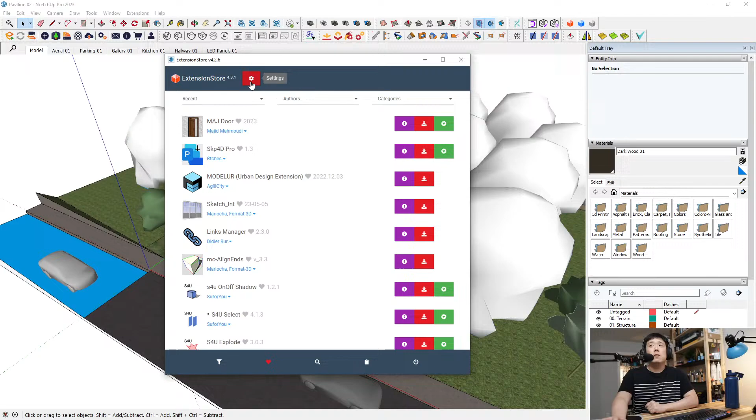Once you click on that, using the login you signed up with, you'll be greeted with this kind of screen. One of the biggest benefits I find using this is going to the settings, where I should be able to see all the machines I've downloaded extensions from — it remembers all the profiles I've used on this account.

And if I go back to a long time ago where I was using, let's say, a MacBook Air, for example... maybe nothing.

Okay, this one here from year 2017, I had about 50 odd extensions installed. So I can go ahead and download all of those if I wish to. It's a good way to keep track of all the extensions you have used in the past. You can certainly update all the extensions that you have and also search for a certain type of extension you would be looking for. I'll show that during this streaming session.

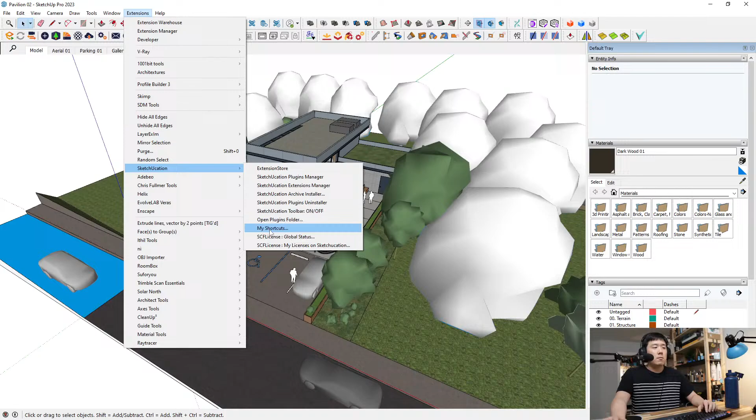I just wanted to let you know there are two different places to look for extensions. One benefit, on top of being able to download the profile, is under the SketchUcation dropdown, you are able to go to My Shortcuts. If you go there, this window will appear and it visually highlights all the shortcuts that you currently have. It's a very good visual tool to see everything in front of you.

I will be sharing a lot of shortcuts because I am big on shortcuts, and I want you to get in the habit of using them. A lot of them are going to be custom. I stick to as many standard shortcuts as possible, but I like to make my own, and I pretty much have them as muscle memory as far as using them. So I will go over whichever customs I have assigned.

For you to assign one, you just go down to Window Preferences, and then under the shortcut side, you should be able to find something. For example, if you want to assign an offset, I have assigned O. As a default, O would be orbit, however I have changed it to offset because I prefer to use O for offset. I just use the middle mouse button in order to orbit around, so that's what I have assigned. To do so, you just go here, press O, and then press the plus button. That's how you can assign custom shortcuts.

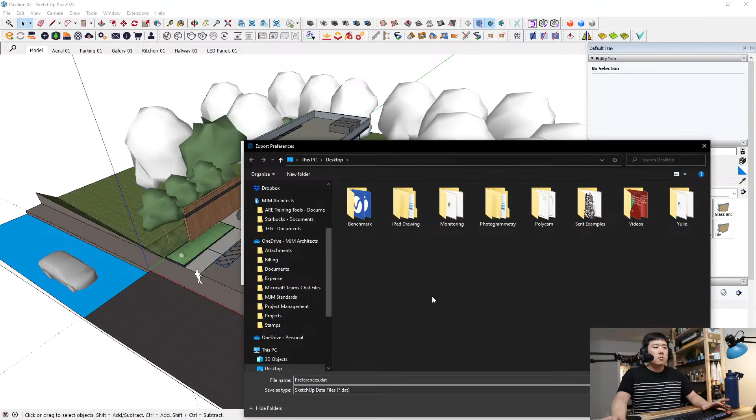And then when you have those shortcuts, you can basically export them and import them as well. So I usually export all of my shortcuts out so that I can import it on a different machine or a different version of SketchUp.

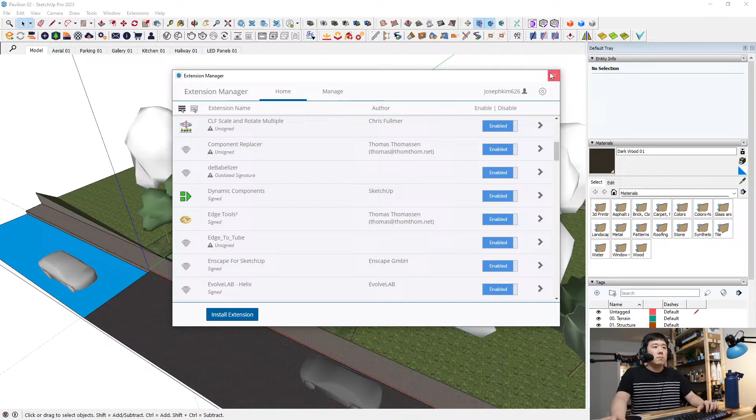So with that out of the way, I want to drop a couple of SketchUp general tips. First thing is, as everybody does, I still would like to use 3D Warehouse of SketchUp, and I'm sure a lot of you already have used it before. So, 3dwarehouse.sketchup.com, or just search 3D Warehouse on Google and you should be able to find it. In here, I often just search, or I usually have my own components available.

For you to find this, you can just say white outline, and then you're going to have to click on models because products have a priority of being shown up on your list. Click on models, and then the first thing that's going to pop up is white outlined 2D people. If for whatever reason that doesn't show up for you, then you can just say white outlined people, and that should really pop up.

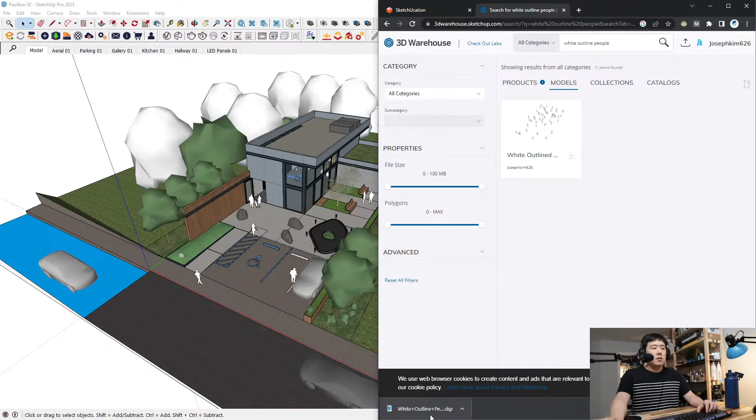You can just download that onto your machine, and then drag that onto your model. You can literally drag and drop, and once you do, those people will pop up. I like using these people because they are simple and not photorealistic, which can be quite distracting. They're light to run.

As you rotate, you can see they are face-me components, so it kind of makes sense in the scene, and they're not as distracting as other types of people you may find. I don't like having a whole bunch of color in the model, so I try to keep them light by using these type of people.

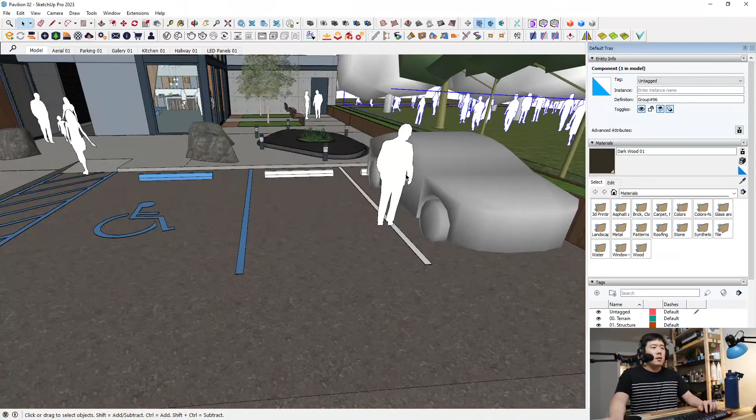In regards to placing people, do keep in mind that you want some grouping or story or reason for them to be there. Obviously, if time's at stake, you're just going to spread them across a field like this, and it doesn't really make sense. But in this case, I try to have somebody next to the car, perhaps trying to get in it - maybe it would have made more sense if he was opening the door of the car.

And somebody just going up the ramp, somebody passing by, and a family of some sort here - I've put two people together just to make sense, like they're coming out of that entrance having a bit of a talk. So having a bit of a setting to the scene doesn't hurt at all, and that's what I like to do as far as placement of people.

Something you might have noticed is that in my dialog, I can go down to styles, and once I hit edit, let me collapse this so you guys can see better. Here, what I like to do is turn off the profiles. Often profiles themselves could increase the amount of calculation that your computer has to do, so I usually turn them off altogether.

If any, you want to put it at 1 so you can see the outline of the trees or blobs that you have. Sometimes people do prefer having that, but your machine could come to a halt if it's turned on, especially if you're working with a model with a lot of edges. So in this case, I want to turn them off.

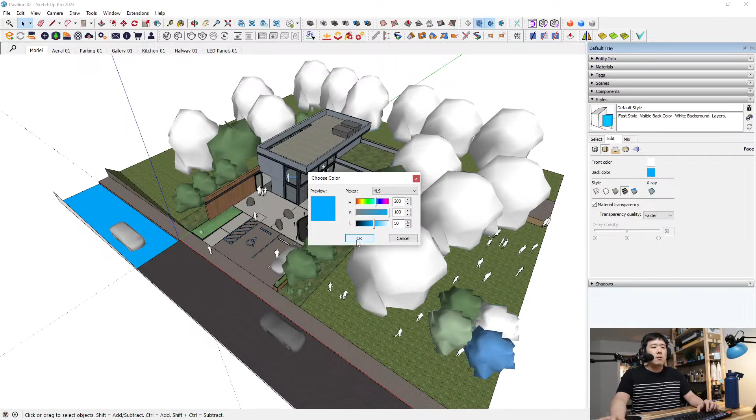So it's good practice to make sure your models are not reverse faced. My favorite color just happens to be teal or bluish, so I made it bright enough to spot them from miles away. For example, this one is where the solid and the modeling wasn't all complete, but you can spot it immediately because of this bright color.

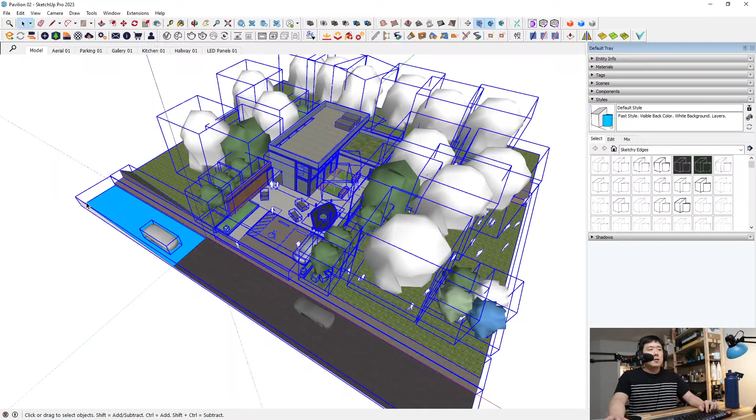So that's what you would like to do. Once you have your favorite style ready, I advise you go to File and save it as a template. Once you have that as a template, it will show up when you start a new model. However, since I've got a lot of assets, if I save this as a template, all of these will show up every time you start a new model, so I'll save myself from doing that. But you do want to get in the habit of using a consistent style.

Another thing to save as a template, or inside the template, is the layering system as well. So perhaps you need to save it as tags, not layers - sorry, tags system is something you can put together that makes sense to you and your type of projects or tasks that you're doing.

In this case, I like to use a numbering slash naming scheme. All the basic information such as terrain, topography, Google Earth, or Google Photo type of thing, I like to name them and have it as 00 so it shows up on top of the list, then goes down to further secondary element structure.

Walls and such, doors and roof and windows would be number 2 category. Obviously the numbers could differ, and your list could be longer or shorter. In my case, I found this somewhat useful, so I stuck with similar organization, varying a bit between projects. This is an example of the tags system I've got going, and I'll come back to that in a bit.

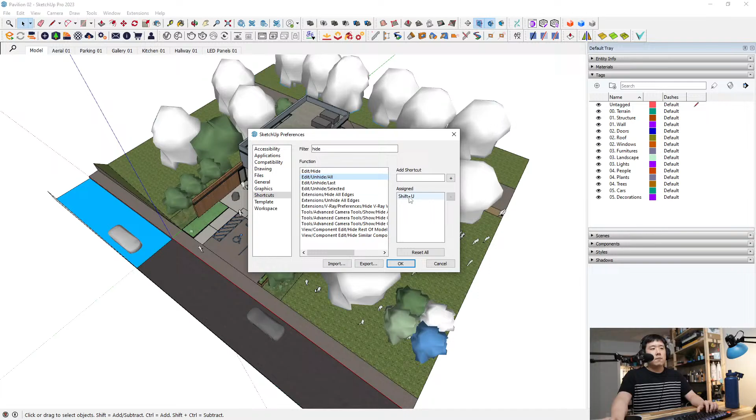Something I also want to mention is usage of shortcuts. One custom shortcut I'll be using in the background - if I search hide, I have Shift H as hide, and unhide all as Shift U. So the keys I'll be pressing - if I want to look inside this model, I can't really see inside.

If I go to preferences and then hide, there is model hide, but also view components hide rest of the model, and I have H as hiding rest of the model. That's essentially going to view, then component edit, and hide rest of the model.

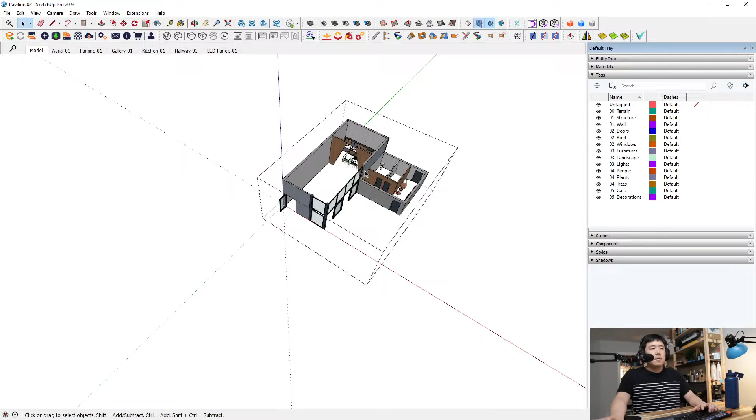What that really does, once I click that or hit the shortcut key, is hide the rest of the model and just highlight or isolate the view of whatever component or group I'm currently working on. That becomes really handy because you can go back and forth easily, either to reference something or just look inside so I can easily edit something. So that's a really easy tool to use, and it's going to come in very handy.

That's something I'll be using. Again, for hide and unhide - I highlight something like a roof here. I have it as a separate thing instead of moving it, because if I move it, my machine thinks it's basically going to physically move them, and I don't want to do that. So I go ahead and Shift H, which is hide, and if I want to bring back the roof after working inside, I press Shift U, which is unhide all, bringing back the roof. So I can hide the roof to work inside, and Shift U to bring back everything. That became a fluid workflow for me, so you can certainly use that.

As far as the layer slash tagging goes, there is an extension from Sketchucation Store. If you just go ahead and search layer name, you can see a couple of extensions showing up.

The reason for this is tags used to be called layers, and I guess the extension names didn't really follow the updates to SketchUp. Here is the one from Tig - layer name export and import is the one we're looking for, made by a person who goes by the name Tig. He's someone who makes a lot of extensions that I use.

So you can go ahead and install and download. Once you do that, you may get a little prompt like this, and then you can choose the first one, then choose the auto install folder, and just say yes, okay. Once you have that, then you're going to have it installed.

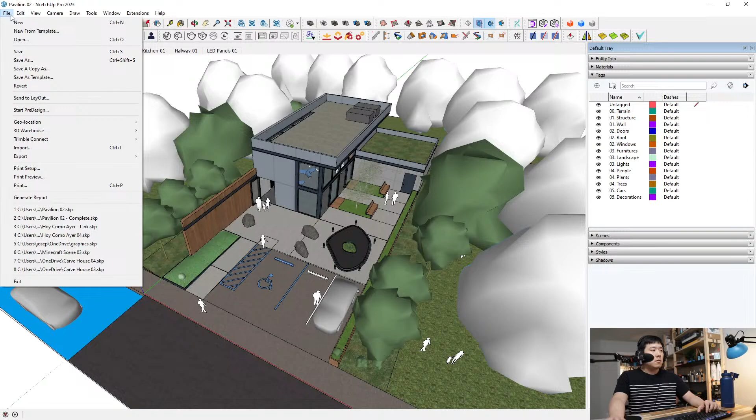Then I can export all the layers that I have so I can bring it back later, or I can go to import so I can bring in all the layers I've got. So I've saved it here, I can just click on it and open - it's going to import all of these layers, even if I had them deleted.

Okay, if I had it deleted, I can use import, and you see how it all came back? So that's something you might want to keep in mind, so that on your template, even if you deviated from the layer list, you can import something again, or maybe you accidentally deleted something and want to get it back, you can certainly do it that way.

All right. Any questions so far?

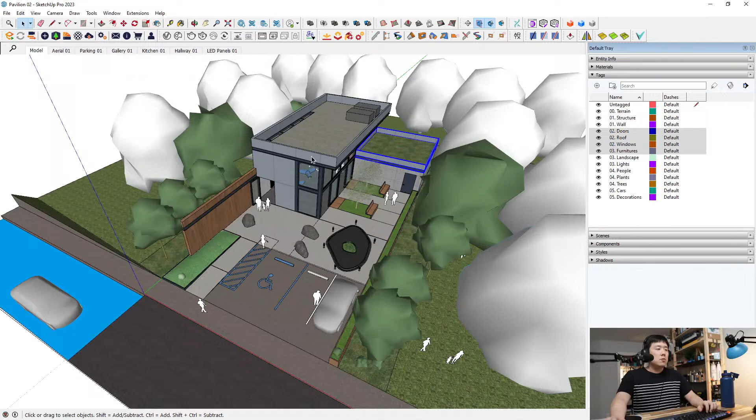Something I do want to cover is copy and paste in place. It becomes quite important because paste in place is actually a default in a lot of Adobe softwares. I don't know why, but SketchUp does not have a default shortcut for paste in place. I'll explain why this is so useful. You can assign a shortcut of Control-Shift-V instead of Control-V for paste. You want to utilize Control-V as well. So my shortcut: cut is Control-X, Control-C for copy, paste is always Control-V universally, and then paste in place is Control-Shift-V.

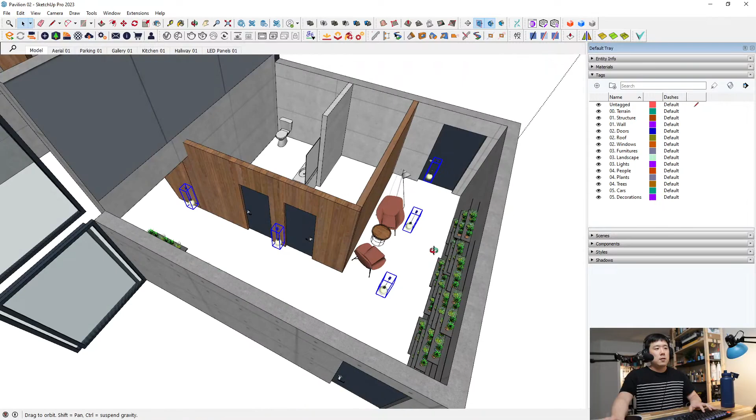Once I hide this and go in here, perhaps you can see that these lights don't really belong in the floor group, or this group that contains all the furniture. So I want to bring all of these pendant lights into that group, and I think it's good practice to do so. Previously you might copy, go into the group, paste, and somehow try to reference something to place them—it's going to be really hard. Whereas if I go ahead and paste in place, or Control-Shift-V for short, it's going to show up exactly on that spot. So you can easily do that. However, now I have a duplicate because I have those pendants outside as well.

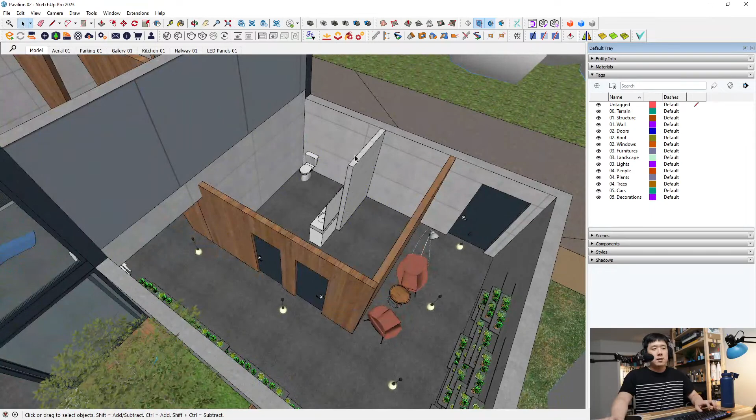So let's go ahead and combine a couple of shortcuts that we picked up. I can select all of these and then cut, Control-X. Then if I double click into the group I want to paste it into, and then Control-Shift-V, that will basically place them in there, and it won't exist outside of that group. So that is a good method to move certain elements in and out of a component. I've done that to bring those things in, and I can do the same with these lights or furniture into a group. Or if you really want, you can cut something out and paste it outside to take it out of the group it belongs in. Those are good practices to get into.

Again, you saw the usage of hide and unhide as well. And as you might have seen, I go back and forth between these saved scenes. Give them a good, meaningful name rather than scene 1, 2, 3, because when you're doing a streaming session or presentation, it's going to be very hard to remember what scene 3 or scene 4 was supposed to be. So it's good to click on them and snap back onto those specific spots you intend to have conversations about.

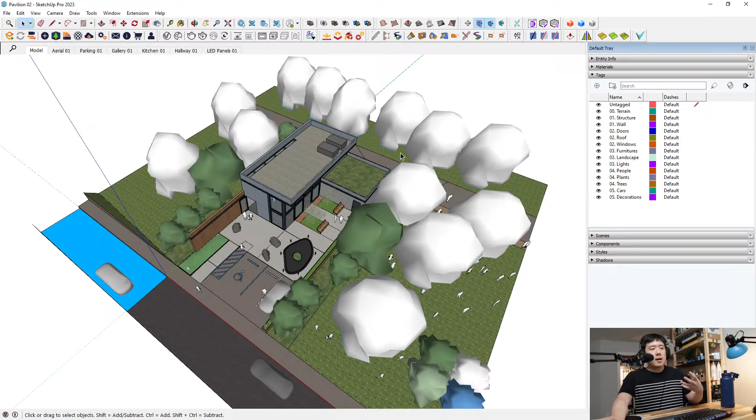As a general practice, I always have a first scene named 'model'. That is to go back to my modeling scene—it just backs out and unhides everything so I can easily snap back to a spot where I can start modeling. Or an aerial view is okay too.

But I also turned off the scene transition. Sometimes scene transition is nice to have, but it takes some time and may actually stutter your machine. Often having animation going through floors and walls is not as nice, especially when working with a very complex model. So in my template, I actually have them turned off. To do that, you go to Model Info under the Window menu, then go to Animation, where you can enable scene transitions or turn them off altogether.

There was one time where there was a bug inside of SketchUp where the time of day would not change on certain rendering engines. So the only way to address that was to have it checked, but set as 0 seconds.

So it just goes to the next scene, but the time of day is respected by other external rendering engines. I have it set this way, and it makes no difference whether it's turned off or turned on. However, if it has any seconds inputted there as a default, I think it's 3 seconds.

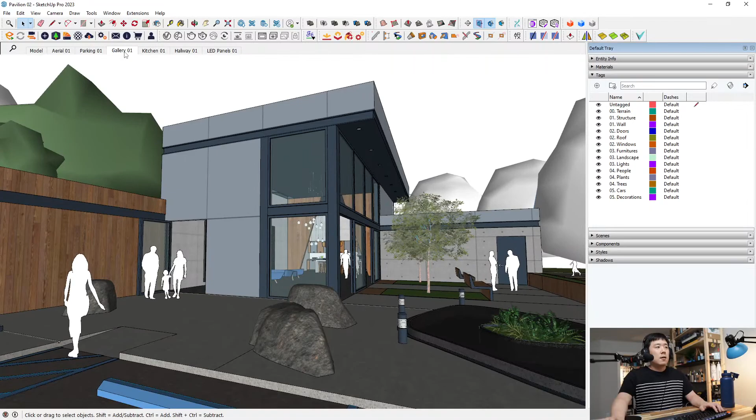Once you do that, you see those animations between scenes. I think in this case it kind of works well because you're just swooping down into the scene, even the gallery. But again, the approach shouldn't be through the glass. Obviously, it doesn't have the intelligence to find the right path when you're going around your building. I'd rather go through this door rather than just bashing your head into the glass. So I don't think this sort of transition works so well.

And obviously, if you're progressing like this, again, I'm going outside of the model as I just pan into this shot. So it may be able to tell a bit better story about the approach and how you experience the space. But I just don't think it's a very effective way because, again, I just went through a wall again.

So personally, I like to just turn it off, or at least have it as 0 seconds so that no other software just kind of bugs out. So there, it's just snappier, and you can always talk about where they are.

And obviously, if I'm just going into the room, I want to do it like this so that people know which way I'm going through to find that space. But sometimes it's beneficial to have a specific shot so that I can go back to those scenes quite easily. So if I want that perfect angle, I can just click on this one so that I can snap there.

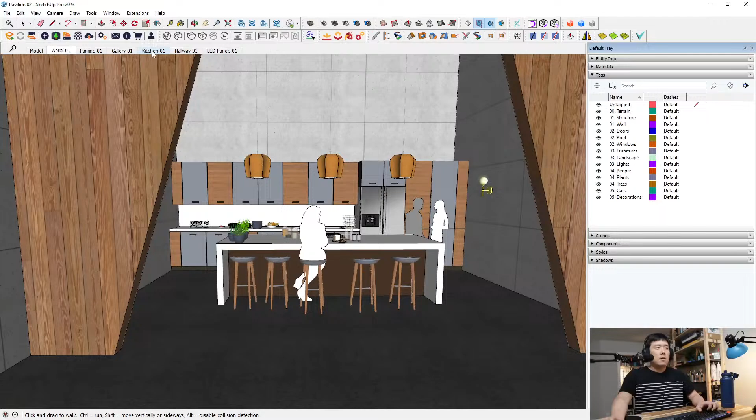And you might have seen me using a couple of other navigation methods. First of all, the orbit. I'm going to use the scroll wheel to zoom in and out. Obviously, you're going to find yourself doing that immediately, even as a beginner. But you can also click on the middle mouse button or the wheel to orbit around. That's a recommended way of navigating through your model.

And then whilst orbiting, if you hold down the shift key, then you're going to start panning around. All of that three-part navigation system—zoom, orbit, and panning—should be all of your muscle memory so that you can easily navigate through the model.

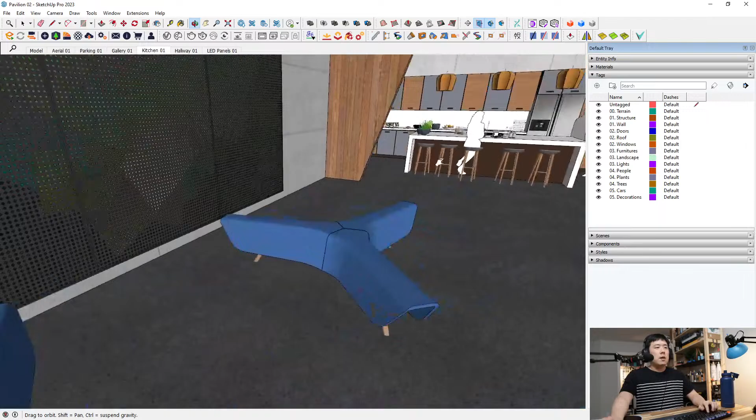Extra points for anyone wanting to navigate even better: if you want to look up and to the kitchen right now, a lot of people will try to pan and then orbit, pan and orbit, just to look up in the area. But again, that's not necessarily a natural movement.

You want to just look up as you navigate through your model, especially during the presentation too. Doing these sort of movements to look elsewhere is a little bit jarring, especially for people who aren't used to the modeling environment.

So what I like to do, when you're progressing into the model, if I want to swoop up and then look up into the entrance, is hit Shift C, which is the camera, and then the walk mode. It's not necessarily a walk mode per se—this is actually a walk tool.

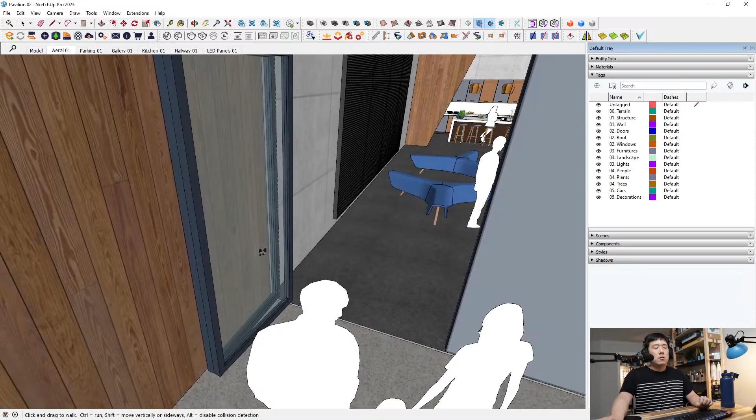And once you're in the walk tool instead of like a selection tool, the footsteps kind of appear in the middle of your scene. And then at this point, if you hold down the scroll wheel just like how you would orbit, you actually look around. So instead of moving, you're going to look in certain directions.

So combined with just a regular selection tool, you can orbit and pan, but if you want to look in a certain direction, just hit Shift C to change the camera. Then I can use the scroll wheel middle mouse button to look up in a certain direction, and I can just scroll in again basically to zoom.

And if you want a really smooth transition, I can look up somewhere and then hold down the left mouse button, and push it up a little bit so that you have this sort of slow animation within your scene.

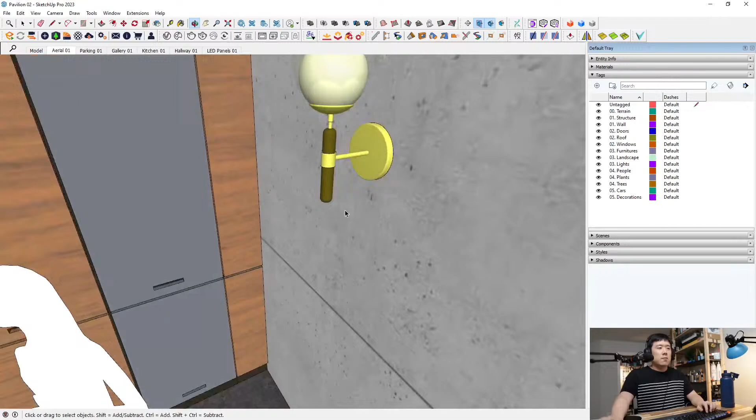So those are the aspects you can utilize, especially when doing a presentation. Perhaps I don't really need to do this when modeling - I want to be a bit quicker. So I may just use zooming if I'm trying to get somewhere, perhaps looking at the underside of this lamp. It makes overall navigation quite easy this way so you can look to a certain side, then hit spacebar to go back to the selection tool, and do that over and over to navigate better.

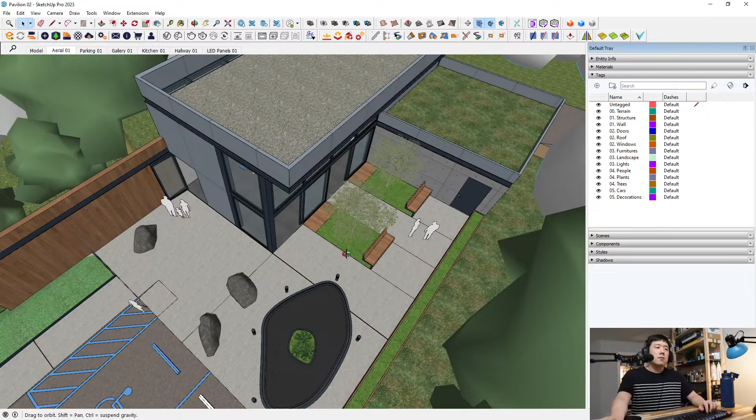So far I have not really covered any extensions that I'd like to use, and I expect this series to be a bit more expanded. Today is sort of the first episode, but on following weeks I want to cover more things so you guys learn more. So just bear with me.

The next one I want to mention is Purge All, something I've been using for I guess more than 15 years since I started using SketchUp. It's located under Extension > Purge, and this is an extension you have to download. If you go to SketchUcation and search Purge, the Purge All from TIG will show up and you can download it. Once you download it, you can also assign a shortcut for that extension, which I have done.

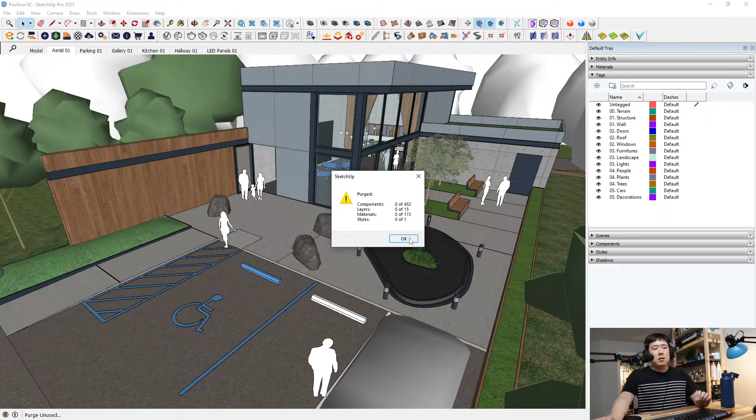So either you click on this or Shift 0 - that's me trying to zero out everything - and here I get to purge everything. By default, everything is set to yes, and once you do that, it purges all the things inside your model. If you've never run this tool before, you'll notice your model size improves significantly, because all the components you've used but not actually placed inside are still saved and eating up storage on your device. So it's good practice to run this to clean out and get rid of things you're not using. This is something constantly useful, and I have a habit of hitting Shift 0 every now and then to run this tool, then I hit OK to accept all of those things.

For whatever reason, if you want to keep a certain type of tagging system you already have - this is a dummy empty layer - if I want to keep that empty layer for whatever reason in the future, I can hit Shift 0. If I hit OK on this, it would go away because it's empty. However, if I wish not to do that, I can hit Shift 0, and in the purge layers dialog, I can say no. Then it just omits that part so it doesn't get purged, and next time I run it, it stays the same so I don't need to worry about accidentally purging the aspect of the model I want to keep.

However, in this case, I don't want to keep that layer, so I'll go ahead and hit yes, OK, and it gets rid of it quite easily. A lot of the time I just hit Shift 0, enter, and then enter, without having to click on anything else. So it's quite easy that way.

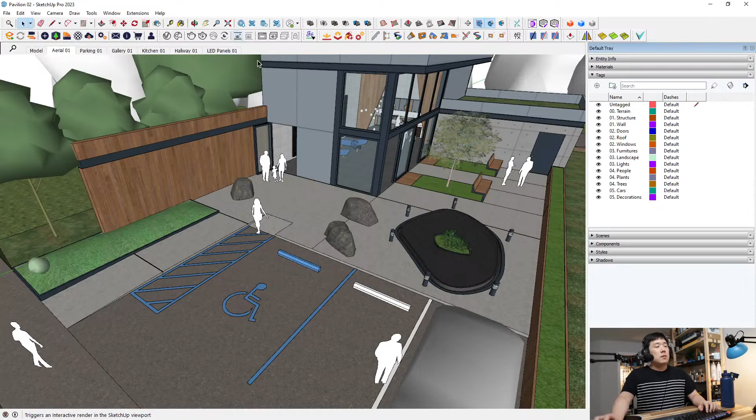The next one I want to mention is ThomThom's Selection Toys, available through the Extension Warehouse - here you go, Selection Toys. This is something made by ThomThom, you'll see his face on a lot of tools as well. You get to install this, and once you install it, you'll be bombarded by a lot of icons that may be available. But I don't really put up specific icons - I actually just use the context menu, which means the right-click menu.

In this case, when I was trying to select all of these lights, I was actually individually clicking them like this when they were outside. So let's just cut them out - I'm going to place them outside so I can easily select them again, just to show you that practice.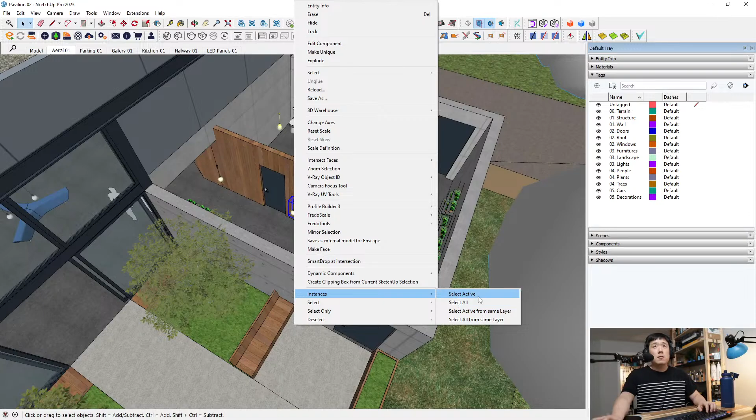I was actually holding down Shift key so I could add those things into my selection. But instead, I can right click this one, and there's a bottom context menu that appears due to the selection toy I just installed. Go to instances, select active, and it selects all of these things that are active in your scene. I can cut that, go into this group, paste in place, and come out of it. I've effectively moved those lights into that group.

And you see how quick that was. If I want to go back in and get rid of them for whatever reason, I can go ahead and do instances, select active, and it will select all of those.

For example, I have all of these tiny little plants repeated several times. I could individually select these, or use window select, but I can right click, instances, select active, and it is going to select everything.

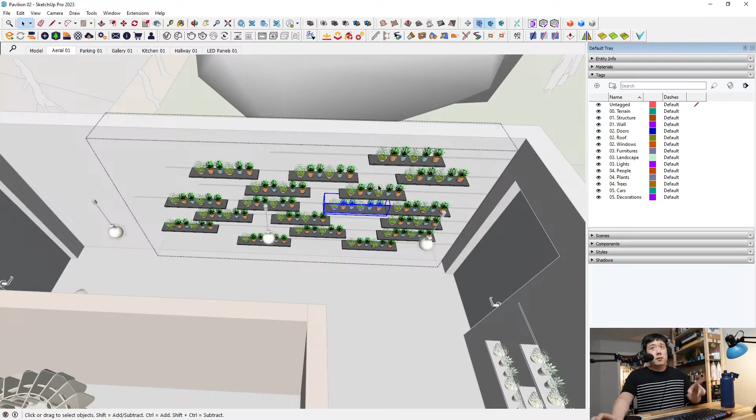However, it is instances active, meaning it will only select the ones of that kind within the group or component you're currently looking inside. So if I were to do instances and select all, you'll see it is actually selecting the other ones outside of this group as well. You can use this to your advantage.

Some of the things I could think of is possibly copying this, and then if I come out of it, even if I've deleted these aspects, I can do copy in place. Actually, that did not bring it into that there. Okay, never mind. But you are able to select outside of the active group that way.

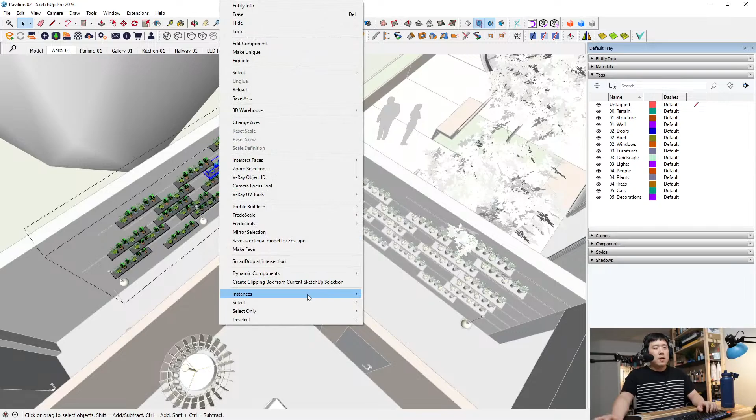But my most use case scenario is actually instances and select active. That's very useful for selecting all the same type of component you've used so far. For example, at these light posts, I want to select all of them, so I go here and have selected all of those, and can make it into a group so later I can come back and just go into the group to have them all collected into a little enclosure.

Next, in regards to selection toy, there are other aspects where it's going to play a role. Another one is when you're looking at more complex geometry like this, there's a lot of thin elements and it's kind of hard to get into the little bitty faces and edges that are here.

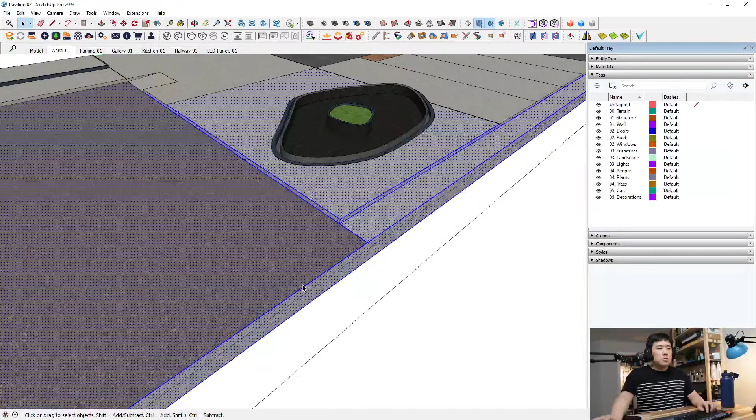So what you can do is have certain things selected, and you can say something like select only the edges. Then it will deselect all other aspects other than the edges. Or I can select all, which is Control A by default, then right click and say select only curves, arcs, circles, polygons, or faces. So if I want to deselect all the edges, I can do that as well.

So that becomes a really easy model manipulating tool, or something that's going to help you manipulate your model.

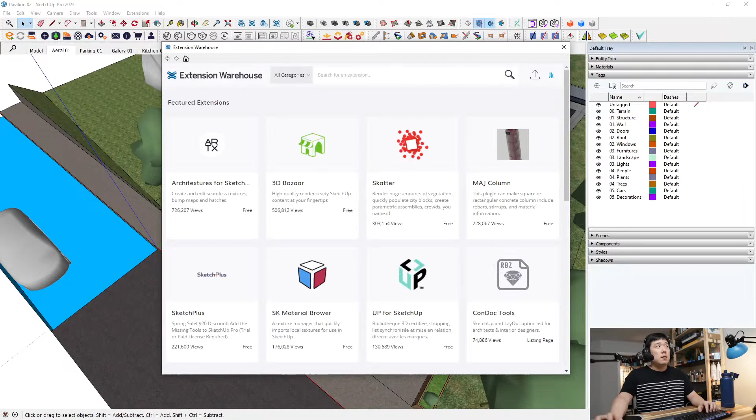The next one is extensions, extension warehouse, and you can search for something called Push Line. It's by Adebeo Pushline — I don't know how to say that — but you can download and install this one. I actually have that button available here, just wanted to show you visually, but I don't really need that because I already have a shortcut of Shift O, sorry, not Shift P, Shift O.

So if I do Shift O, for example here, I've got this slope and I would like to stick in a slope at just that incline so this car could rest on it. However, if I take a rectangle tool and try to do that, you'll see my rectangle doesn't really form that way. There is a way to do that, but it's a little troublesome. I think the easier way is to just push pull this line up to there so it forms a face, and I found that to be a bit more intuitive.

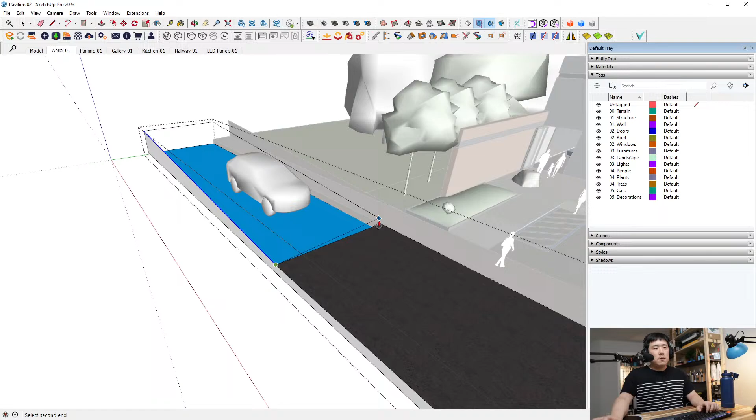So I hit Shift O. And once I do that, I can just click here and click right there, and it just forms the surface for me. And again, you'll still see this blue surface, which is the back face of the model.

I can correctly enclose that by taking a line tool and basically drawing a surface. In this case, I want this sort of asphalt on it, so I just applied it there. Now that car could rest on top of here.

Also I want to fill in this bit where the pavement goes up following the ramp as well. So I can just go here, double click. Again, I am using that hide rest of the model shortcut. Then use a line tool, take this one here, click on there, also click on here, click on there.

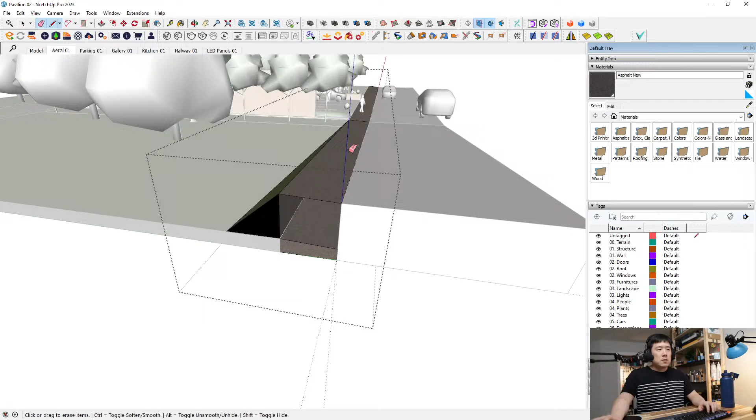Because this is kind of sloped in multiple ways, it is actually not going to be able to form a surface if you do a rectangle. So that surface needs to exist — actually, I guess I could delete that. And then also if I do triangulation here, there's nothing over here, as you can see. So I just have to draw that and then delete this one.

So now I have a slope that goes up along with the ramp that I have drawn. Actually, there is a little bit of slope, as you can see, so that's a bit that I can do. Perhaps I can even this out if I want to make it flat, but I think that's all right. So that's what you can do.

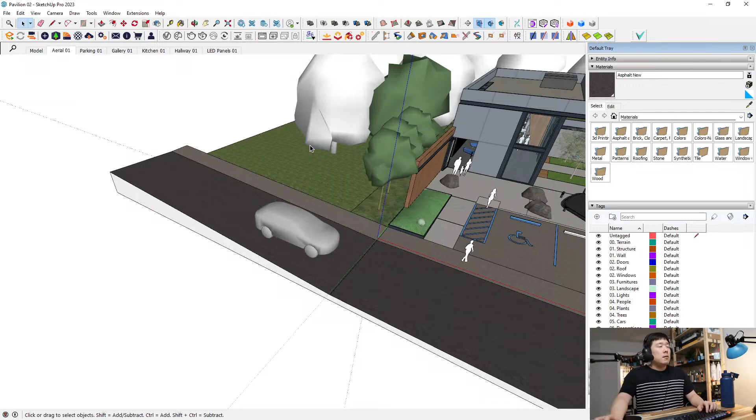Something that I want to do is basically dropping this car onto this surface. So I can go to extension and ray tracer, and that ray tracer is also available in the warehouse by ThomThom as well.

So this one here. Once you have that, something you can do — for example, like this planter over here — if I want to drop it onto the slope that it's got, I can go to ray tracer and drop component, and it is going to basically drop to the origin point where that red, green, and blue line generates from. That's going to just touch the surface that is underneath that component or the group. So I'm going to put that back up.

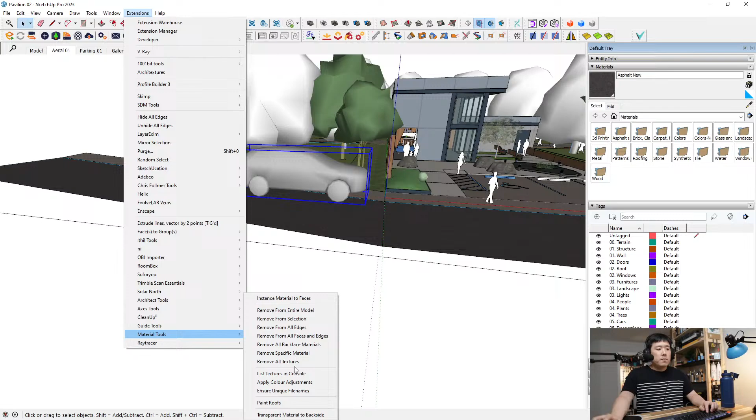However, in this case, if I were to do ray tracer drop components, then this wheel is not necessarily going to rest well, and also the front wheels are going to float. In this case, you want to drop it on the slope, not necessarily to a single point. You want to slope the car, or incline the car, if you will.

So I just undo that and then go to extension, ray tracer, drop component by bounds, which means that blue box that actually shows around the component that you have. Once you do that, then it is going to drop on the slope.

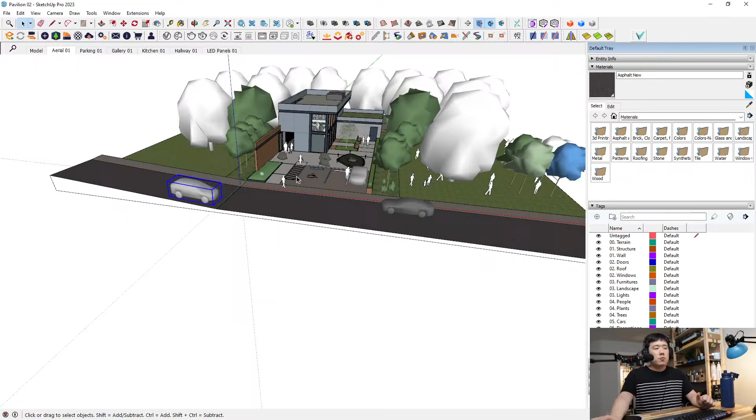So that becomes quite easy to drop trees and cars or people and such. If you have a car that is just floating, then you can just go to extension, ray tracer by bounds, and it's going to drop onto the surface. You can fix those very easily, even if these people are all over the slope of, say, a dune that you have drawn — then you can drop all of them to the surface.

In this case, I've got all sorts of trees, so if I were to drop them, they're just going to drop onto the trees. But let's attempt it. You see how some of them fell onto the ground, whereas some of them are just hanging out on top of the tree. So you can do that, but again, it's an easy way of placing people over a slope or surface that is curved.

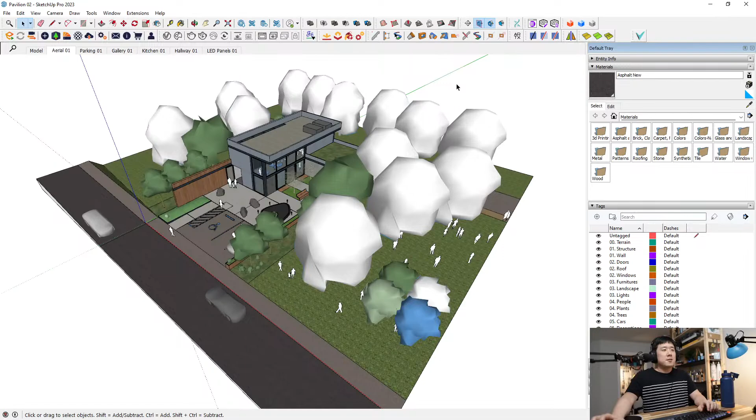Something over here — because this sort of presentation was formed for Enscape, I wanted to just show you what kind of Enscape assets I was using. In a similar vein, all of these trees are actually Enscape assets. So what I tend to do is, when you place these assets, you do it by going to the Asset Library of Enscape.

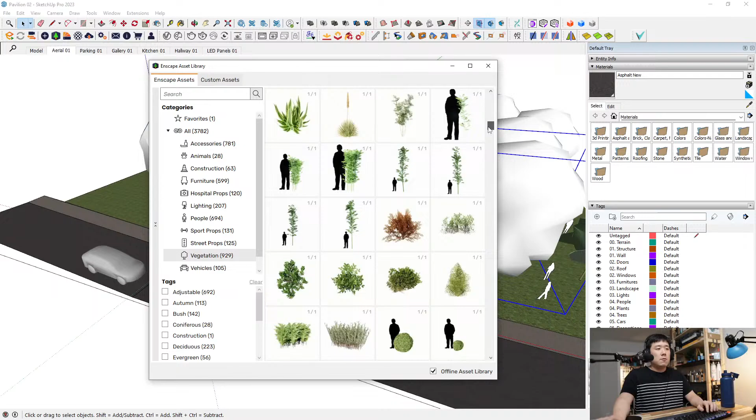Under there, you can easily find the vegetation, and vegetation will have a lot of things in there. I can pick something like this tree here, and once I click that, I can just place that into the scene. Obviously I can put a lot more than that.

Once I bring that in, I usually go to the entity info and have that changed to a tag that it belongs to. So I want to tag that as trees, so that next time I open the tags and just click on trees, all the trees become hidden. That's a pretty good practice. Once you put in something either from 3D Warehouse or Asset Library, you want to have them belong to the correct tagging.

So once you do that, another aspect that I do is I make a new material. Here, a relatively bark-like color, and I'll just name it tree bark. Then I go in here, double click it to add it inside of this component, and then I will add that color onto the bark.

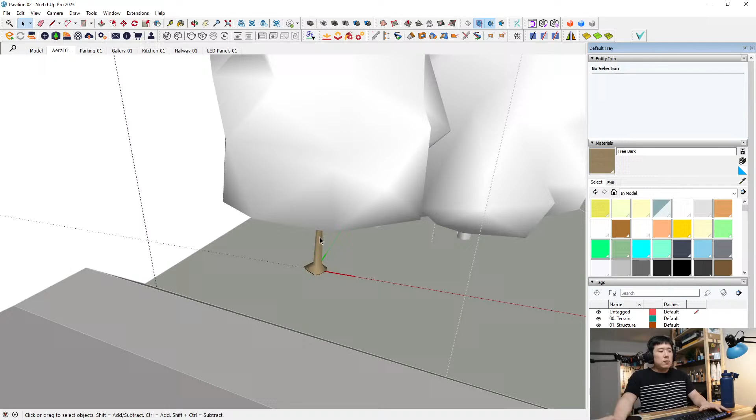I do that because having a completely white tree in the scene could be kind of jarring, especially when you're looking at things in SketchUp, not in the rendering. In the rendering it will look nice, but when you're modeling, sometimes you want to present out of SketchUp because SketchUp is good enough to showcase a lot of geometry in the space you've designed. So it's useful to have that.

So I just assign color to the stem. And if you were to add a color or material on top of, let's say, not inside the component, then it is going to change whatever the default material is. This white right now that is showing is a default color.

Because of that, if I were to come up with, say, tree color 01, this red color is going to show up on this tree while maintaining the bark color, because that was actually assigned inside of a component. So this way you can have a bit more randomized tree color.

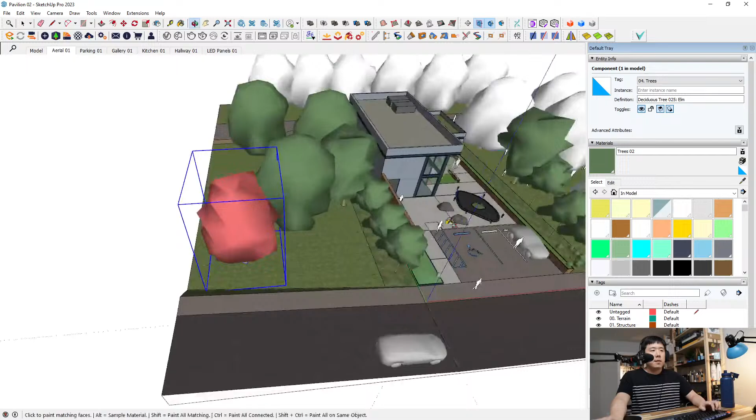I can sample this tree color and then apply it here. And if I were to have all the same green color, it's going to be a little bit weird. So you might want to have, not the blue type necessarily, but slightly different colors between them, so even though it's actually the same tree, you can have a bit of variation between them.

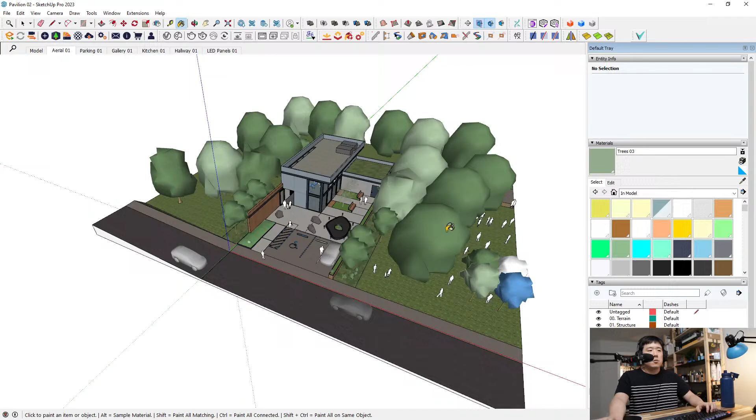Instead of clicking all of them, I can right click, go to instances, select active, so that all the same trees get selected. Then I can apply that color, obviously they're all going to be the same. So in this case I want to randomize a little bit so I have different color trees in the scene as well. That's basically how this clump of tree was generated.

So that's what I do in terms of plants and trees, just so they have a bit of variation between them. It doesn't actually change the color of the rendering, but I think it looks a bit more natural, or less jarring, because once you have the exact same trees in the exact same orientation, it's going to be very obvious and it's not going to look as nice.

Another one I want to mention is component replacer. What component replacer does, in conjunction with selecting all the same components within your scene - here, these are all the trees that are exactly the same component - let's say I want to replace them with this new tree I've put in, or perhaps even small ones like these instead of a big one, and replace all of them.

If I go to instances, select active, I actually have to have that extension installed. So you can go ahead and search component replacer - it's made by ThomThom - and you can install that. Once you install it, I can go ahead and find that right here.

Perhaps it's over here. Under tools, you're going to find component replacer, and I have that set as shift V. I try to assign shift whenever I'm using an extension.

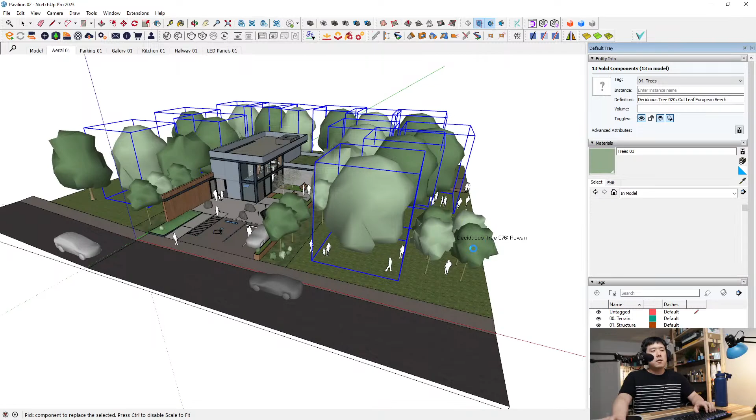If I click on this tree, it's going to replace it but in the same scale, and that could work especially for a tree since it blows up to respect whatever bounding box you had. However, if you look at the bottom, it says press Control to disable scale to fit. If I hold Control and then hit this tree, it comes in at a scale of 1 without being blown up or shrunken to the existing bounding box size.

So it may be more useful depending on the situation, especially when you're trying to put in a different size chair, you want to enable Control so the new chair doesn't become too small or too big. In this case, I want to just snap back where it used to be.

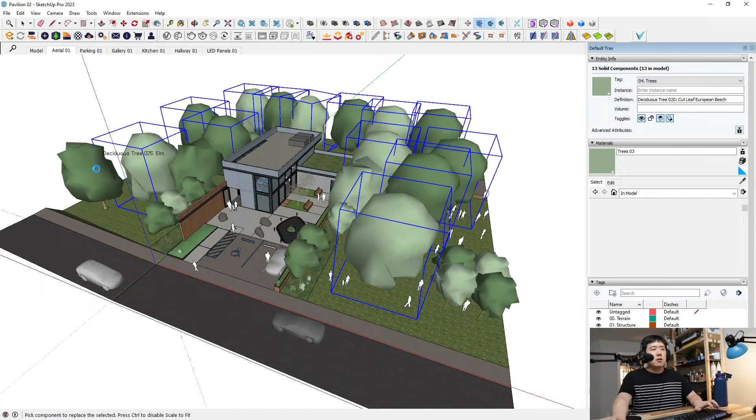Perhaps this new tree I put down is what I want to use. Then I go to instances and shift V, and hold down Control so the new tree comes in at a scale of 1, and it replaces all of them. So I can delete this one, and now that tree has been applied everywhere. All the orientation is respected as well, so if you had any rotation, that's going to be done on them too.

One other thing I'd like to show is if you go to SketchUcation and search for random, there's going to be Random Select by TIG, and you can download that. Once you download and install it, Random Select becomes available under Extensions. Here, I can type in 50%, and 50% of my current selection is now selected.

This way you can randomize a lot of things. For example, if I had all of these trees as this dark green color, especially when you have hundreds or even thousands of components within your scene, you can random select those things.

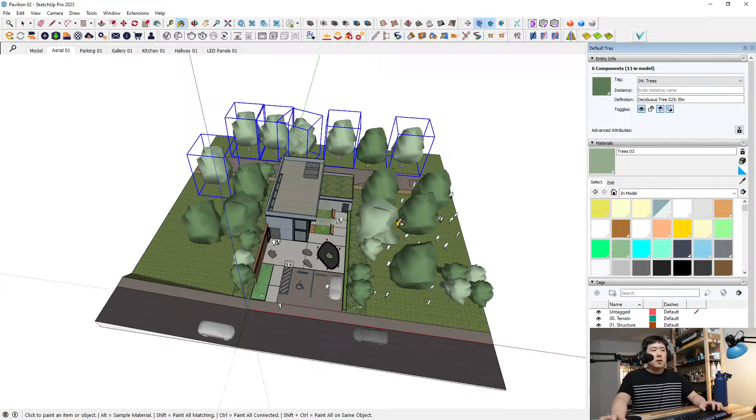So under Instances, go here and random select 50%. Then I can apply a lighter color so they're randomized. It doesn't look as randomized, so I'll adjust this one. You may do some adjustments later, but the principle is you can do random selection, which adds a bit of automation for selecting randomized elements within your model.

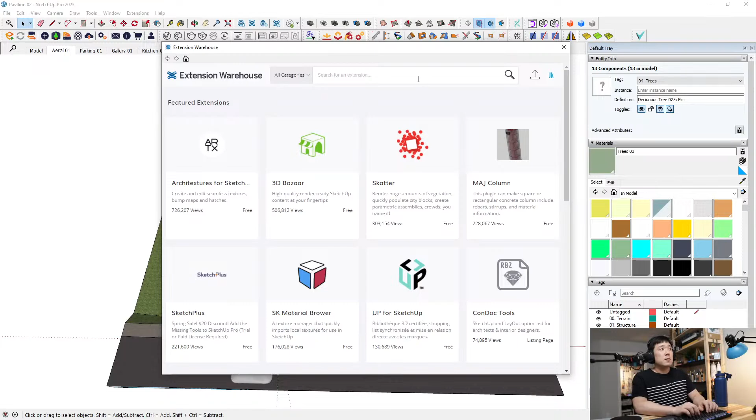Speaking of randomizing, there's a random scale and rotate tool as well. Some of these trees aren't rotated; they just look exactly the same. To adjust that, go to Instances, select all of active, and you can download a tool by searching scale and rotate. Chris Fulmer has made this tool, CLF Scale and Rotate Multiple.

Once you download and install it, under Extensions there's Chris Fulmer Tools, and you can find scale and rotate randomly. Once you do that, this dialog pops up showing minimum scale factor 0.5, 1.5. Don't be frightened by these numbers—it basically means what's the minimum scale of all these things. I'm going to say 0.9 and 1.1 so there's not as much variation between them.

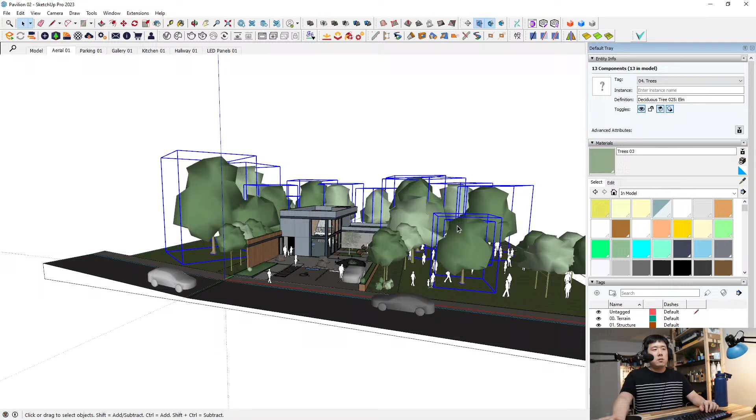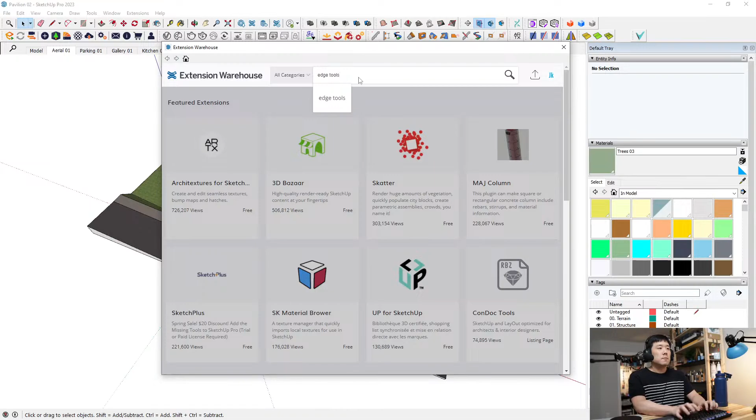When it comes to cleaning up, in addition to the purge tool, shift 0, which you use to purge, you can use something like Cleanup from ThomThom and also the Edge Tools from ThomThom. You can find both by going to Extension Warehouse, Edge Tools—this one right here with an icon of a cookie—and then Cleanup.

Cleanup and edge tools both exist when you look them up. If I go in here, I believe I left some edges here. You see how all of these edges kind of exist, but just in a random fashion, and these could certainly be cleaned up using the eraser tool like this.

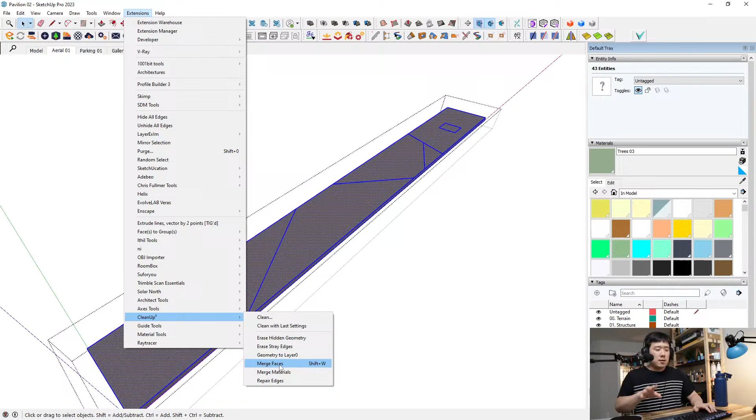But instead of doing that, I can automate this. So select all, then go to Tools, not Edge Tools sorry, Extensions, then Cleanup, and run Merge Faces. As a shortcut I've got Shift W. If you look at your keyboard, W is next to E, and E is next to R, and there's a reason I've assigned it this way. So if I select everything with Control A, then Shift W, it starts to get rid of the edges in between. Anything that's coplanar and has the same material is going to merge together, merge faces, so that gets rid of those edges. It got rid of the edge bounding this box, but some of the remainder edges may still remain.

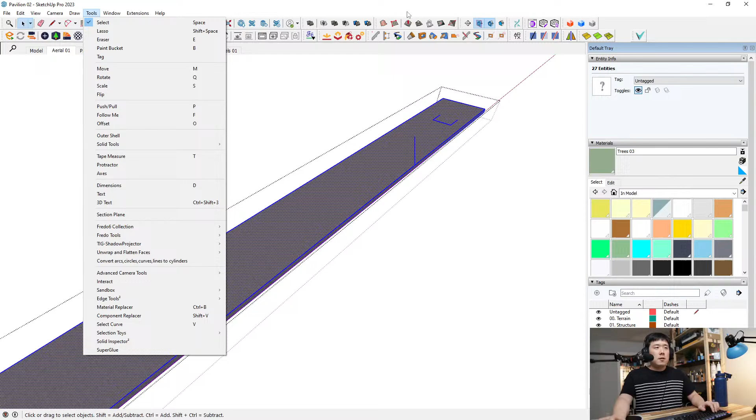If that's the case, you can go to Tools and then Edge Tools. The next one is E, next to the W key, and you run Shift E. If you hit Shift E, it's going to clean up all the edges just hanging about, not doing anything. That's a really easy way to clean up your models. Again: select all, Shift W, Shift E, and I've cleaned up all my surfaces quite easily. So if you've got a lot of edges and things not actually doing anything within your scene, you can use that to clean up your model quite easily.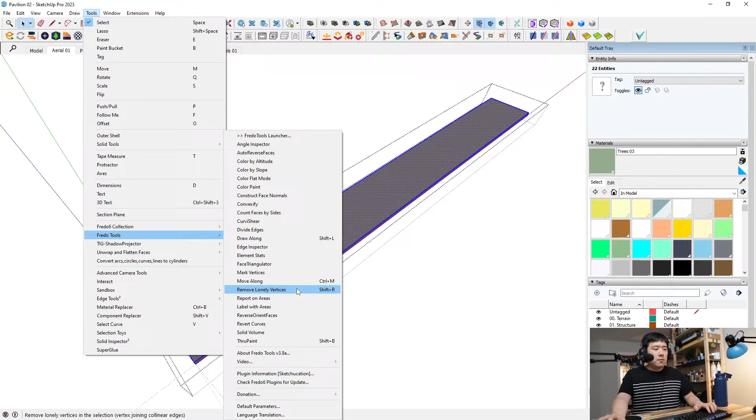There's a bonus point for using Shift R, which is currently assigned to Fredo Tools. I actually don't know exactly how to find it. So, Fredo Tools... yep, here. Under the Tools dropdown menu there's Fredo Tools, and here I've got Shift R, which is one after E. So W, E, R: Shift R, remove lonely vertices.

Once you do that, there are a couple of points in my model that are actually edges not forming a continuous line. For example, if I had this line, just to demonstrate visually, I can turn on endpoints within my model. Once I turn that on, you'll see a little blip show up on your edges. To get rid of any cutoff points like this where it's segmented, the only way is by drawing an edge or line from it, like so, and then using the eraser tool to get rid of that segment.

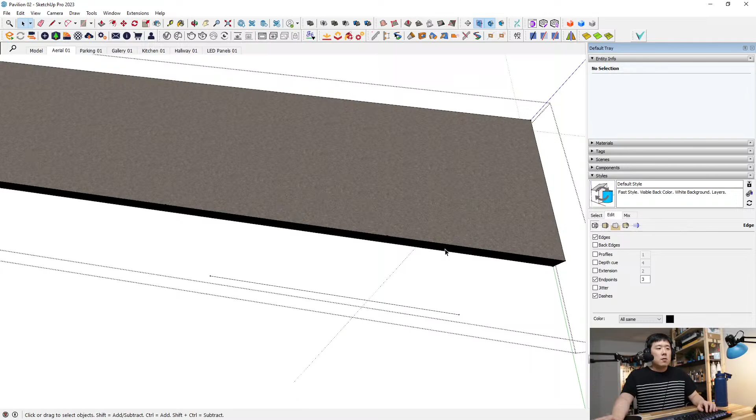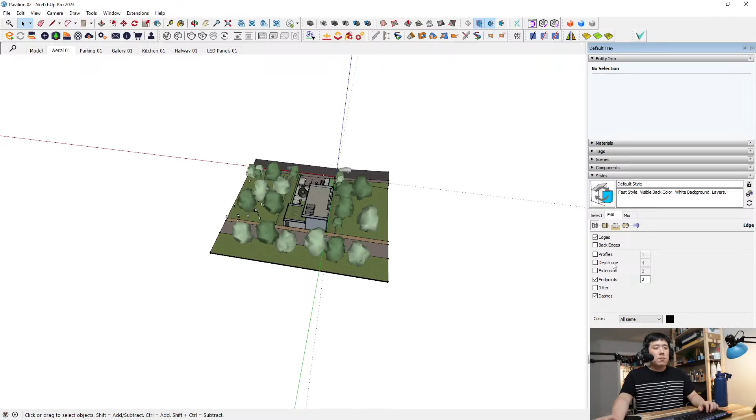It's labor intensive, especially if you're trying to do that for hundreds or thousands of segmented edges. So to make that easier, what you can do is: Control A to select everything, Shift W to clean up all the faces, Shift E to get rid of any edges or lines doing nothing, and then Shift R again to get rid of any segment that exists within your scene. Here you can see there are two blips and a segment of an edge. While this tool is running, it highlights that for you so you can see it — there's 4 lonely vertices, or segmentation happening — and you hit OK and it gets rid of all of that. That just cleans up your model quite easily, and that's what I usually do to clean up a model.

This is especially useful for something you get off of 3D Warehouse, so you can just download it and run that tool to make sure there's no wasted edges, surfaces, or vertices in your scene.

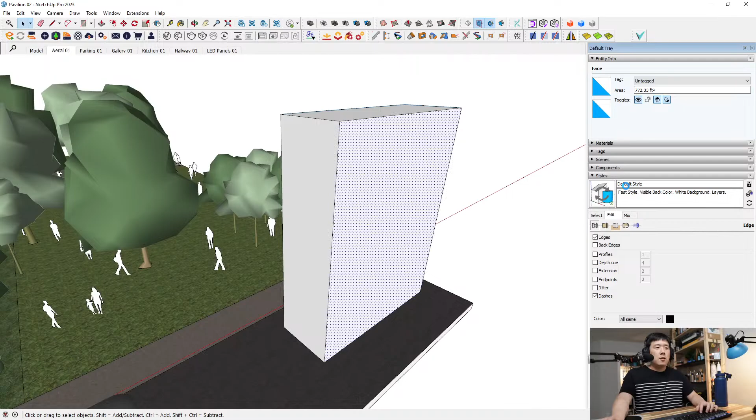Once you download it, what happens is that a lot of times when you make a building or some sort of surface inside SketchUp, people do this: you've got this building, and you want to convert it into some sort of curtain wall. So you assign some bluish color, make it transparent, and call it curtain wall 1, maybe not even naming it.

Because you want this to have some mullion system, you can use the array function and divide it by, say, 10, and also divide something like this by 5 maybe. So you have this sort of curtain wall generated.

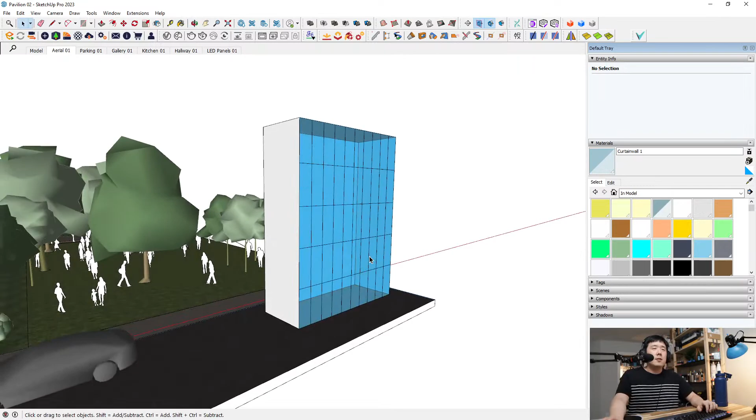One of the troubles is a lot of rendering software won't respect these lines that show up in your scene, and will just treat the entire thing as one surface. Also, you might want to make it into something more substantial so your curtain wall is not literally just a surface.

So if that's the case, first I would not really have geometry floating like that. I would make this into one single group and everything else as something else, so I can play with this surface easily. Let me cut that out and paste it so I can freely change it.

In here, I can select everything and go to extensions, then extrude lines vector by 2 points. That's what shows up if you install the lines to tubes extension.

Once you do that, a dialog should pop up, but it's not showing on my system for whatever reason. Maybe it doesn't work anymore? Oh, it's a different tool - I'm sorry, that's not this tool. My apologies, it should really be convert arcs and circles, curves, this one here.

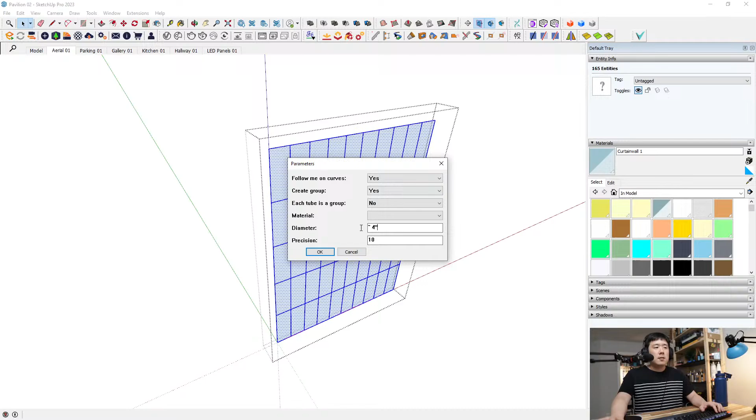The diameter I want to be 4 inches. Precision of 10 isn't really good because it strikes a circular shape. I want it to be somewhat blocky, like a diamond shape, so you read it as not circular. So I put down 4, meaning 4 sides. If I do that, it's going to create these mullions.

So a 4-inch diameter mullion gets created. I can cut that, use the paste-in-place trick, and you've got all the edges turned into little tubes - that's what generates the mullions.

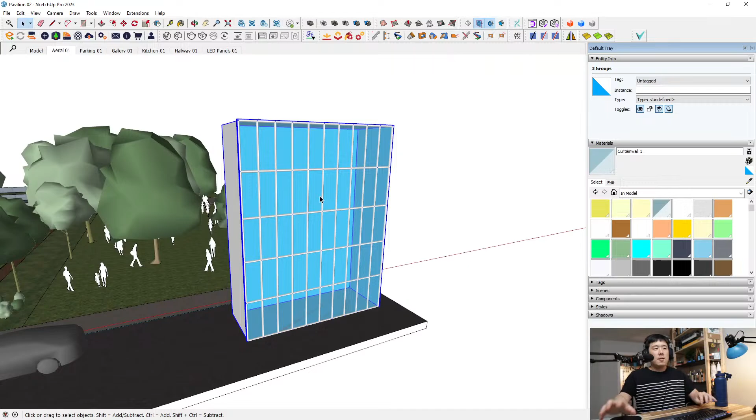Especially if you have something very complex, like using a soap bubble or lofting to get a curved surface and want to strike a mullion on top, this is a good way to generate it even on surfaces that aren't flat. So that was a little preview of what that tool can be used for.

The next tool I want to showcase is a mirror tool. It's right here - I don't need to use the menu because I have a shortcut, but if you go to the Sketchucation store and search for mirror, TIG made another tool called mirror that you can download. I have a shortcut of Shift M for this.

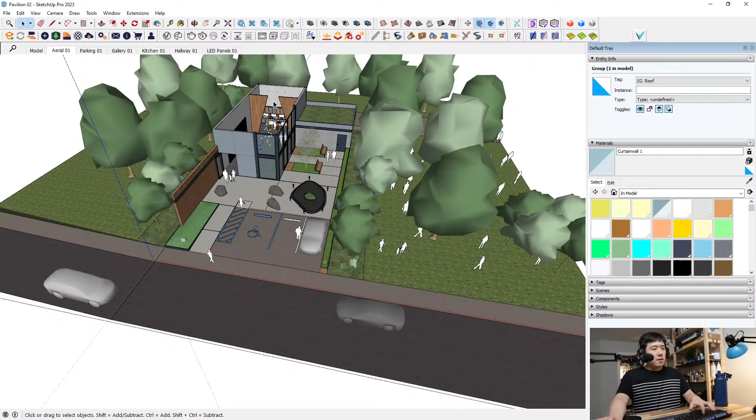So for example, if I want to have a car, or maybe inside of this building, I've got these sconces on the side of this wall, and let's say I want to have them mirror onto this side. SketchUp used to have flip along, but now they have a different tool for this, which is the mirror tool, or flip tool if you will.

You can just click on that, and then click on red, and it will just flip. But it doesn't create a copy. If you want to create a copy, then you can hit Control, and then I can just do a copy.

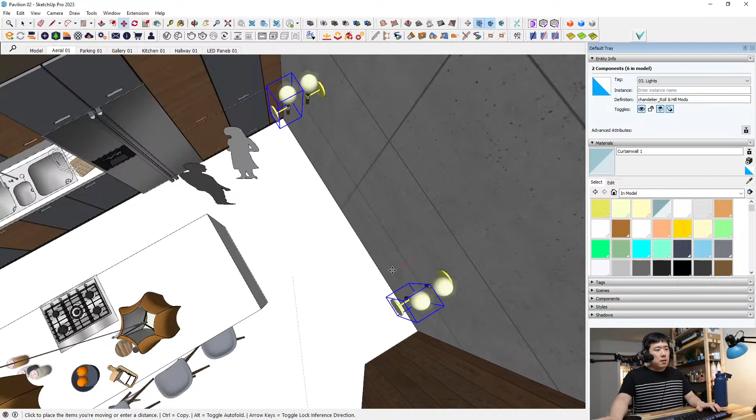So it creates a copy, but the trouble is that once I have made that, I have to drag it, move it along the red axis, and use it on that surface so it sticks onto that surface. I happen to grab the wrong one, so let me go back and try to grab the correct one. Okay, I did grab it. So use this, have it along the red axis, lock it with the shift key, and then reference the surface so that I have kind of glued it onto this wall. That was a lot of steps.

So if we were to go back, if I select these two, or right click and select all instances, then I've selected the two. And then if I run a mirror tool, that little icon, or if you click on here, I think it may show up. I actually never used the drop down menu for this, so I'm not sure where it shows up.

Let's see, mirror, mirror, mirror. Do you guys see anything? Draw? Nope. Tools. Mirror, mirror. Sorry, I just used the shortcut Shift M, so I'm having trouble finding it. Okay, I give up, I will just use a shortcut. So, oh, maybe right click? Here.

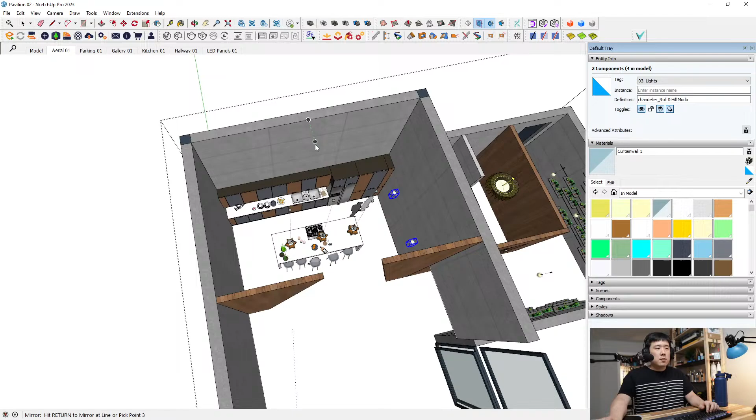Mirror selection. Good, so it shows up on your context menu. And then I can just highlight somewhere midpoint here, midpoint in the group. Click here, just move along the green axis, click once more, and then move along the blue axis. So you're just drawing that plane that you want to mirror off, and then click again, and it asks you, do you want to erase the original selection? And I say no, so that I can keep that there. And now I have mirrored it.

So in hindsight, to do it quickly, I can just do this, and without explaining what I'm doing, I basically do the same thing that I just did. So that was a lot simpler to flip and move it against another wall. This mirror tool not only flips the things, but also mirrors it so that you have a mirrored component or group that exists on the other side rather than just in the same place it was initially placed. That becomes quite useful, especially when you're doing a lot of mirroring and copying and pasting.

All right, I'm on actually the 29th page of the document, so I think I covered quite a bit here. Unless you guys have any questions, I'm gonna wrap up things here so that we can continue this in perhaps next week. How about that?